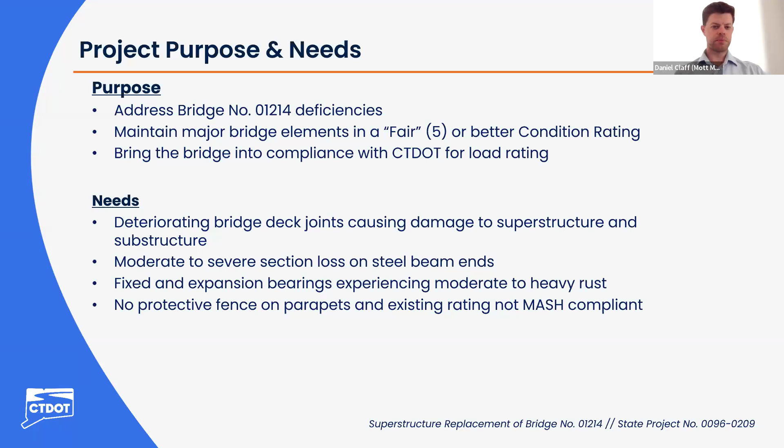As I mentioned, the bridge was originally built in 1962, and it's only had one major rehab effort, in 1994, which primarily consisted of painting. So this is an old structure and will definitely need some work performed.

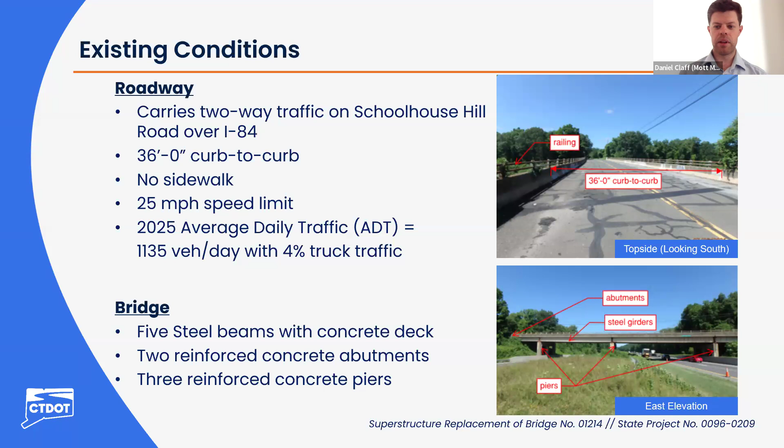I want to talk a little bit about the existing roadway conditions first. The last inspection of this structure took place in 2025, about a year and a half ago. During the inspection, various elements of the structure were given a rating, and this rating goes from 1 to 9, with 9 being the highest possible rating.

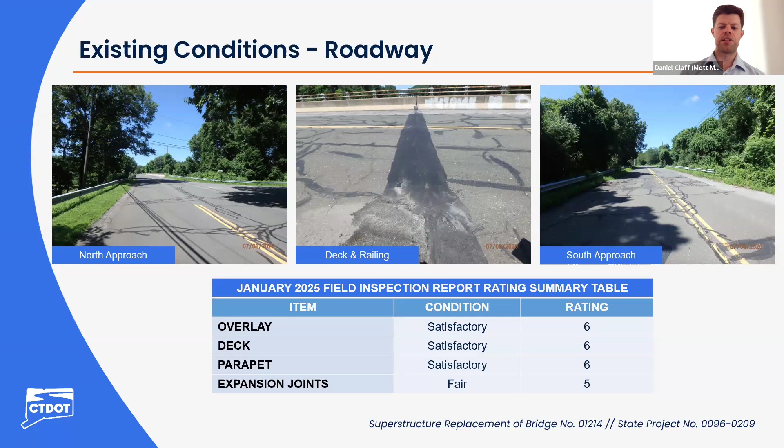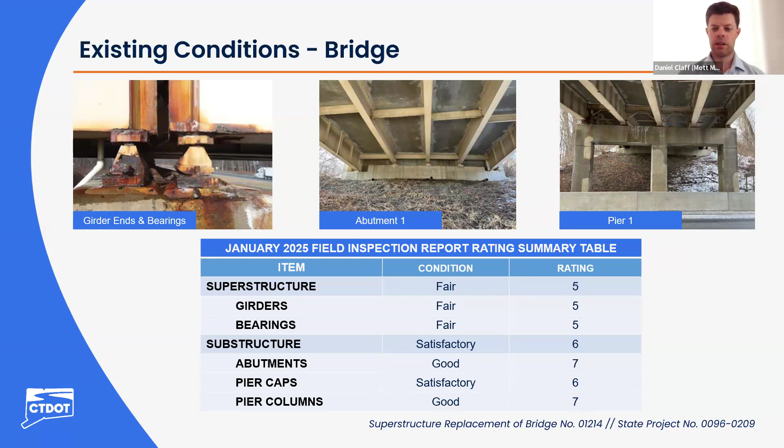As a result of what was observed in the inspection, it was determined that the best approach would be a superstructure replacement. Essentially, we'll give the structure a haircut, taking away the existing superstructure and putting a new one on top.

We will take off the existing railings and parapets, the existing asphalt, the concrete deck, and the existing girders. Once we've taken all those things off, we will perform repairs to those piers we saw in the previous photo.

Once the repairs are done, we will install new bearings. Then on top of the bearings, we'll install new girders, a new deck, new parapets, and finally a new chain link fence on the parapets.

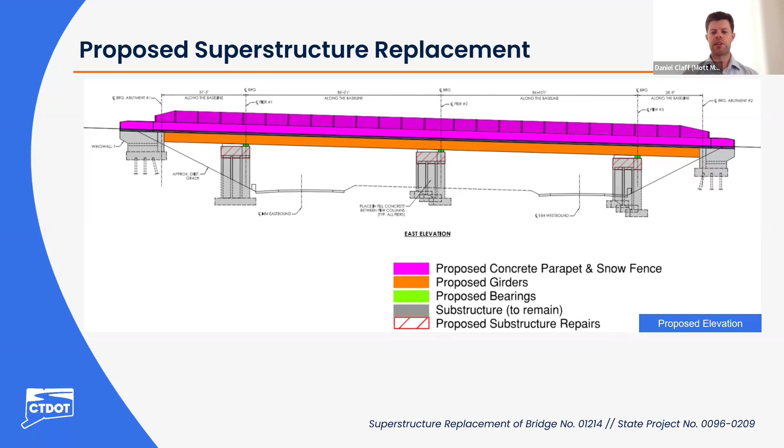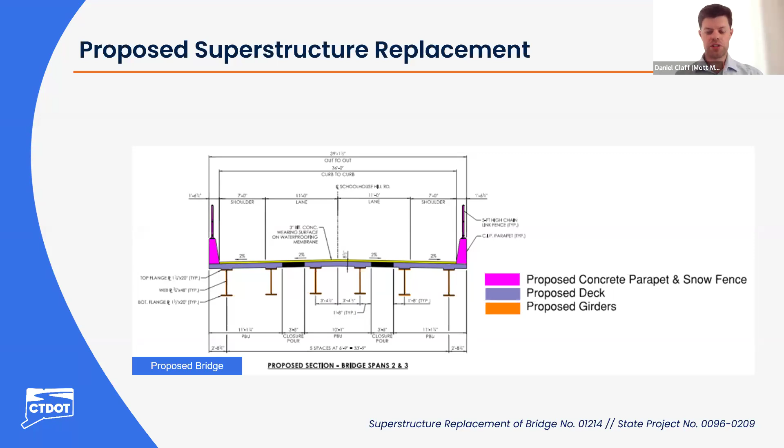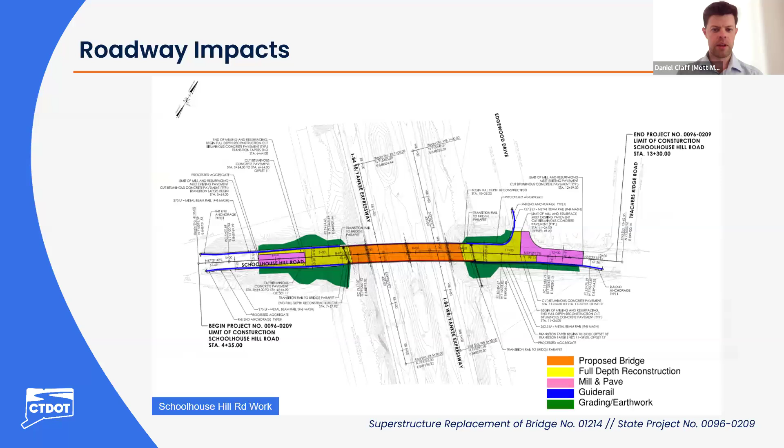Good evening. I'm Sam Martha with VN Engineers, and we are the maintenance and protection of traffic designers for the project. The goal of maintenance and protection of traffic is to design plans for the contractor that provide safety for the construction activities while limiting traffic congestion or delays for the traveling public as they navigate through the work area.

In addition to this long-term stage, the contractor will also be allowed to close 1 lane, leaving 1 lane open during allowable off-peak hours. These allowable hours are provided to the contractor and use recorded traffic volumes to determine the hours of the day where volumes are low enough so that the lane closure would not cause significant traffic delays or congestion. These are the extents of the traffic impacts on 84, and in the next slide, we're going to look at the impacts to Schoolhouse Hill Road.

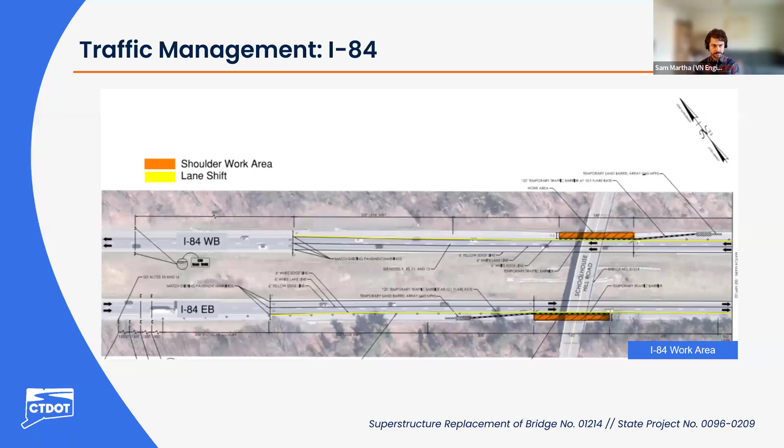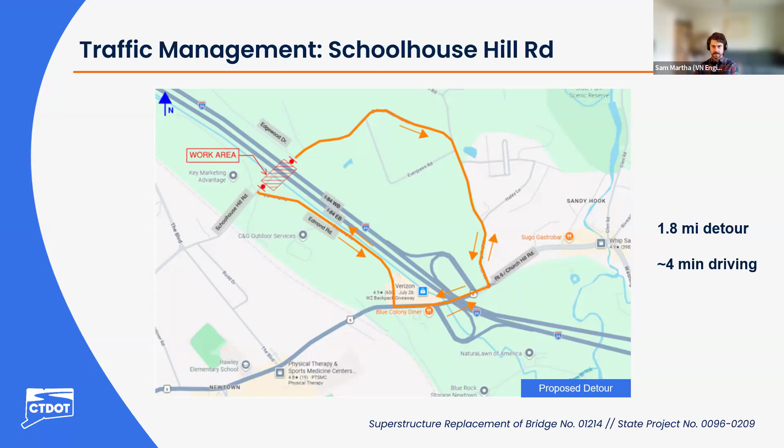This closure is anticipated to be in place from spring of 2029 to fall of 2029, with the goal of limiting the duration as much as possible. I'm going to pass it back to Daniel for the rest of the presentation. Excellent. Thank you, Sam.

So now turning our attention to additional impacts. Thankfully, with this site, we have a lot of space to work in, so we don't anticipate any right-of-way impacts due to this project. In addition, given the nature of the site, we have no permit-required environmental impacts. And in terms of utility impacts, there is only one utility in the vicinity, and it's an overhead communication wire that is along Schoolhouse Hill Road. However, we anticipate that the construction can be performed without impacting these wires.

Next, please. Finally, I'll turn to the project schedule and costs. I will mention that these costs and schedule are preliminary because we are still fairly early in design, so these are subject to change.

But the overall cost of the project is anticipated to be approximately 11 million. This cost will be split between federal funding and state funding. And then the construction schedule will predominantly fall during 2029. The project will begin in spring 2029, and the bulk of our effort will be done in the fall, but overall construction will end in 2030. This is therefore essentially a single season construction project.